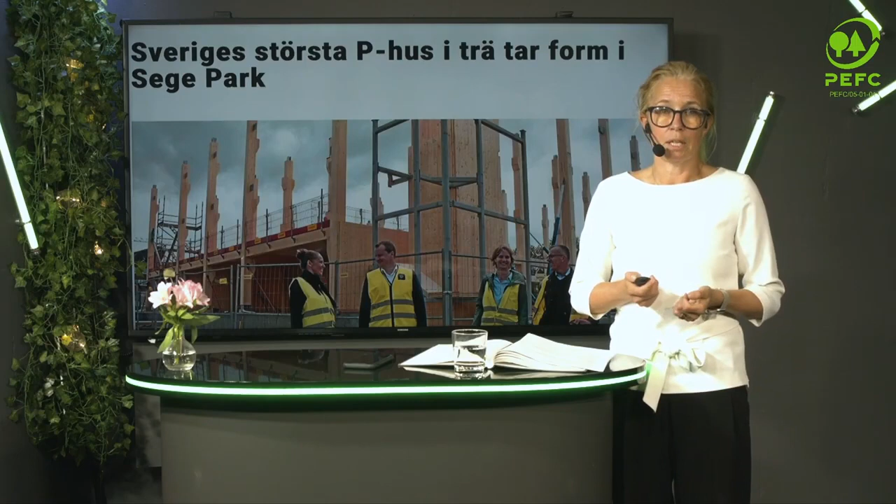This is an office building taken from a time-lapse video camera up in Uppsala, north of Stockholm. And a parking house is being built down in Skåne, in Malmö, 6 stories in CLT.

We have caring homes, and we have also a lot of other types of infrastructure, such as this windmill in Glulam and LVL. And it's being erected, the first ones, outside Gothenburg in the archipelago.

And it's built with the same logic as we build other types of building and even housing. It's built in a modular way. It's really easy to transport thanks to the lightweight and the modularity of the construction. And it's being erected on site and has a really, really low carbon footprint.

And we, of course, also see wood as an interior material for interior use. Also this staircase, which is on NCC's new headquarters in Stockholm, is being prefabricated and transported into a building site and then put into place at a building site.

So why wood in construction? Well, it's not just about exchanging one material for another. It also means that we have a new kind of business logic. It goes from being very much project-orientated to process-orientated. So the process itself, manufacturing technology, quality assurance, continuous improvements, experience feedback, all characteristics from the industrialized wood building industry.

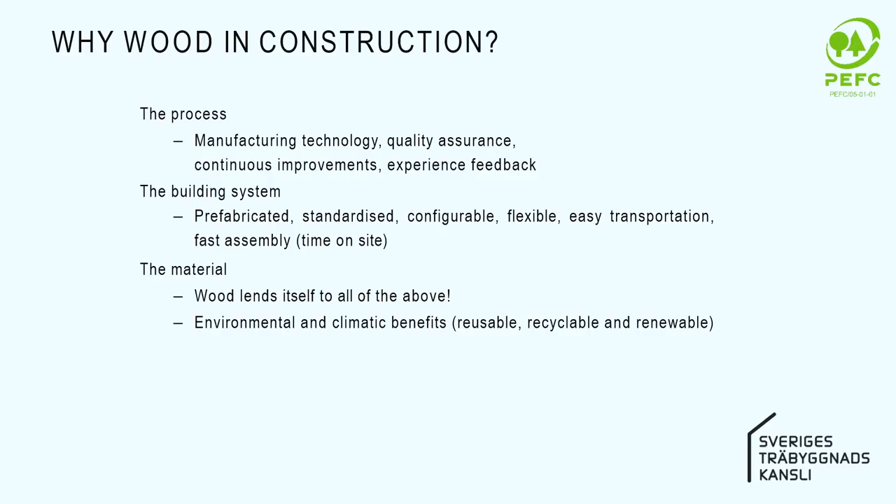And then we have the building systems: prefabricated, standardized, configurable, flexible, easy transportation, and also fast assembly, meaning a short time on site. And the material itself, of course. Wood lends itself to all mentioned above, and also thanks to the environmental and climate benefit from the material itself. It's reusable, it's renewable, it's recyclable.

And the construction industry, when I'm talking about more effectivity and the need for a new building process, has during time proved to have difficulties to develop in the same way that other types of production does. Still has a very poor productivity in general, and actually no improvement at all compared to industrial production. So this is really an area and a hugely important area where wood construction comes into play.

This is perhaps also one of the most important issues to deal with when it comes to sustainability, is to really make use of all the resources that we take on.

Wood construction presents three major building systems. We have the modularity, with modules built to a very high degree with prefabrication off site. Almost 85 to 90% is built at the factory. All the kitchens, the bathrooms, etc., are mounted and put into place already in the factory.

Short time on building site, and just the small adjustments are built on site, which is of course highly useful when we build in the already built environment, and also of course cost effective.

The pandemic perhaps made us wonder about this, but it has proven that the wood building industry is going strong out from this. We have a wide presence at the leading universities, with the big universities having wood construction within their education. There is a lot of municipalities developing knowledge through wood building strategies, and we have some 15 producers of timber building systems.

We have big investments in new capacity, especially in CLT. New suppliers, new producers are entering the market. And we see also that the building industry, the big entrepreneurs, are taking on wood projects at a growing pace.

We have strong wooden architecture, a great variation of projects throughout the country. And there is also a strong political push for wood construction. I'll come back to that.

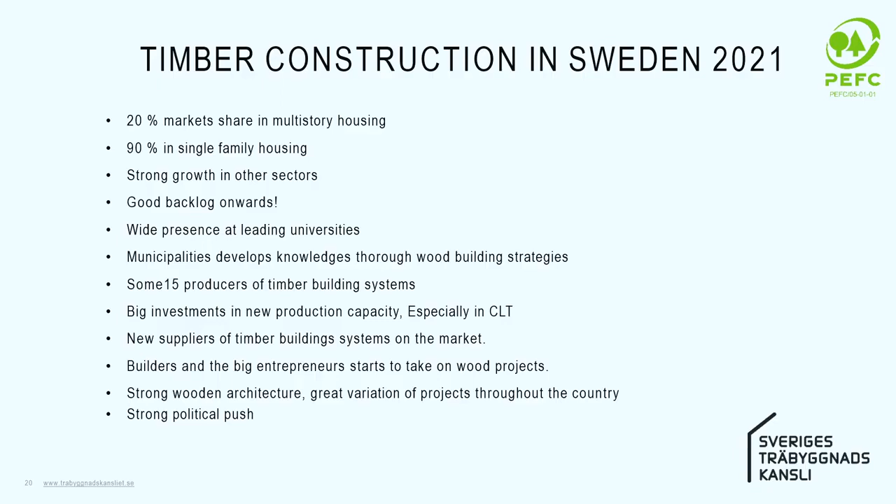The driving forces for wood are these. First and foremost, now it's the climate, the need to change the way we build, the material we use. But there is also a need for housing. We still have a shortage of housing, almost all around Europe, in the world, I would say. But in Sweden especially, this is a driving force.

But also a need for a new building process, as I just talked about. And of course, work opportunities. Going towards a development of the off-site construction industry means that we could move construction work from the big cities towards smaller cities where the wood building industry is located.

And they are located where the raw material is. So it's along the coast in Sweden, up in the north and down in Småland and on the west coast, predominantly. But you can also turn this into the driving forces. It's now or never. This is Agenda 2030, and this is what Sweden as a nation has committed to, but also the regions, the municipalities, and the whole building chain are working towards the Agenda 2030 goals.

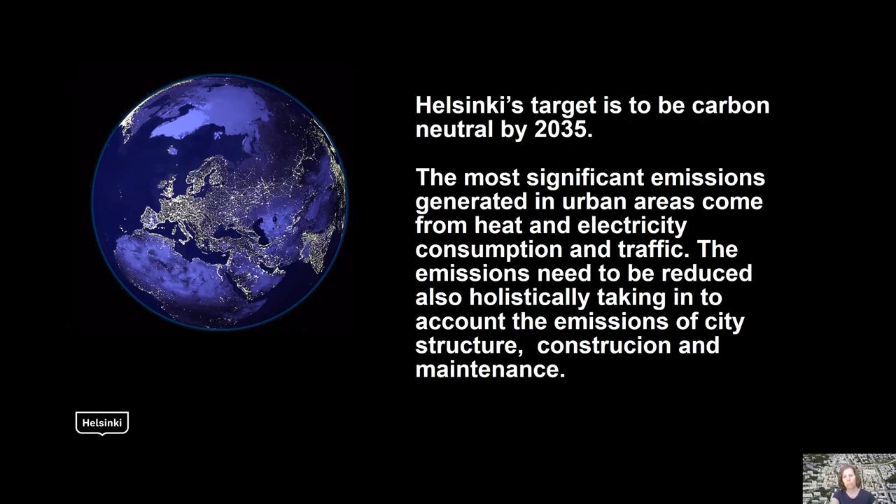Helsinki aims to be carbon neutral by 2035 and has an action plan with 147 actions towards this goal. We need to implement every single one of these goals now if we want to achieve it. The action plan affects basically everything we do. We need to look at Helsinki and the world through carbon neutral lenses.

19 of the actions affect detailed planning one way or another. Wood is one of the big issues in the action plan also.

So why would we have to build with wood? In order to reach carbon neutrality, at least at the moment, we need to focus on wood in the building industry. In the Carbon Neutral Helsinki Action Plan, I think one of the most important actions in detailed planning is to build more wooden buildings. In building construction, we need to choose the lowest carbon materials possible, and at the moment, wood is the answer to this challenge.

People have often asked me, is there enough wood to build so much? Well, if you build a 5-story apartment block from wood in Finland, it takes 10 minutes to grow back in the Finnish forests. Or the same thing, if you build 138 wooden apartment blocks every day. So at least in Finland, it's not an issue. There is enough wood.

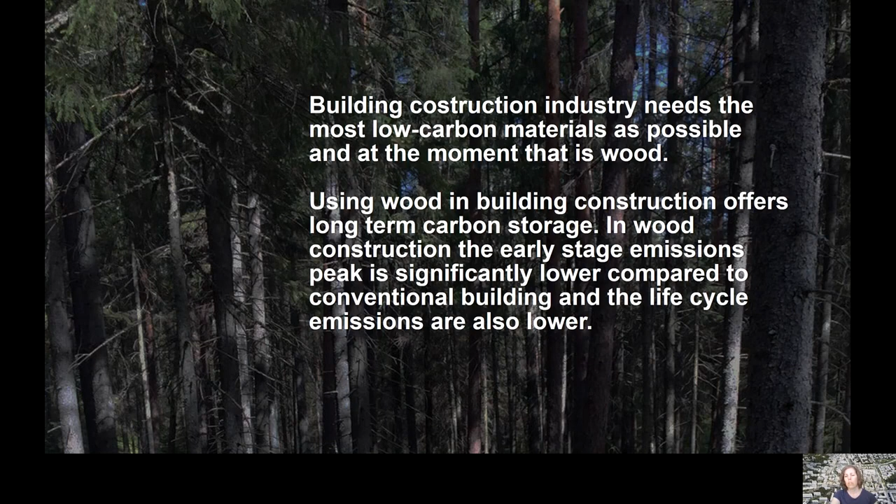Wood offers long-term carbon storage, and the emissions during building construction are significantly lower than in conventional building.

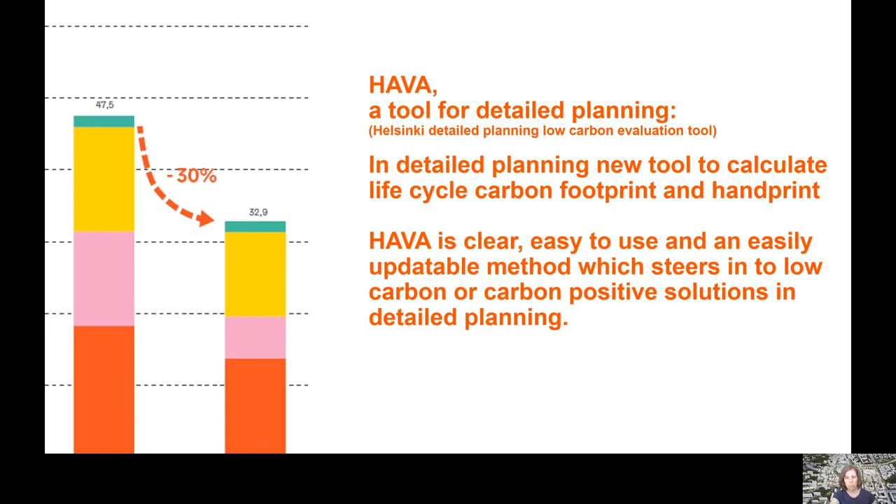We've generated a new tool for detailed planning called HAVA, to calculate life cycle carbon footprint and handprint. We made it so simple that it could be used in all our detailed plans so that we could get as carbon neutral as possible. Construction and maintenance may be almost 50% of the emissions in the life cycle of an area, so using wood in construction is a very significant part of aiming for the carbon neutrality target.

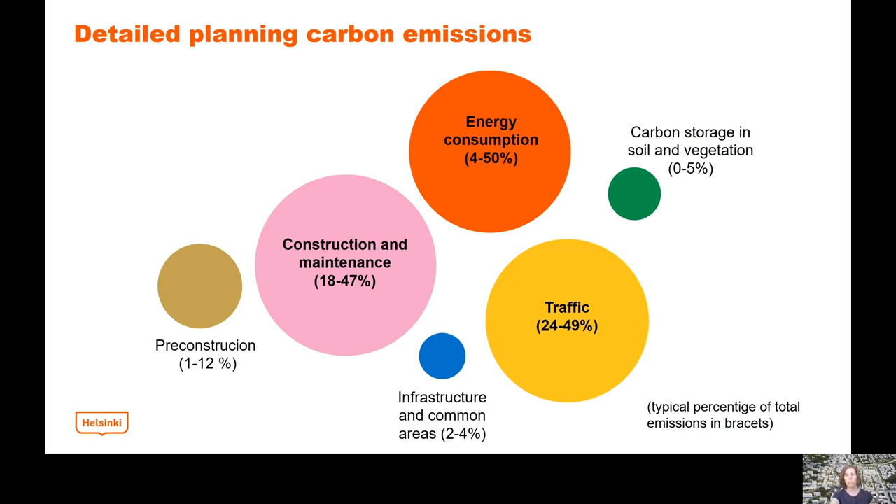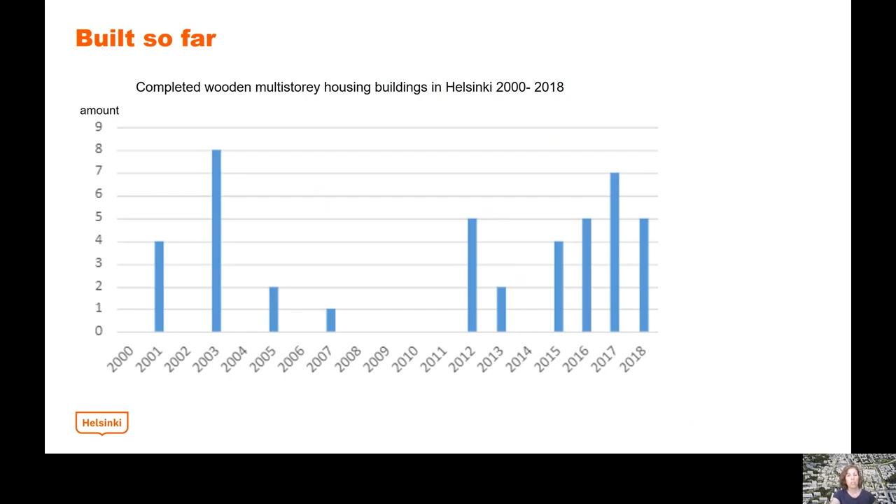The first detailed plan which required wooden structure in multi-story housing came into effect about 20 years ago. There was some experimental building, and not all were actually built with wooden structure. But the one with wooden structure gained a prize and some praise.

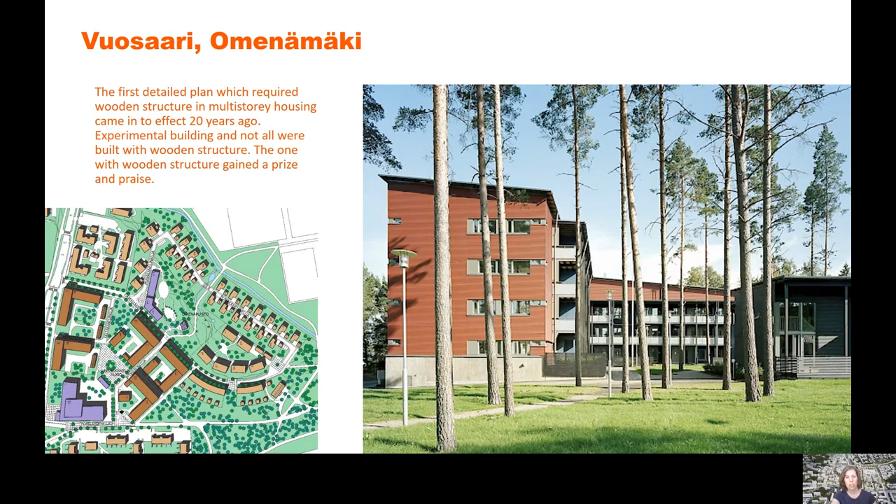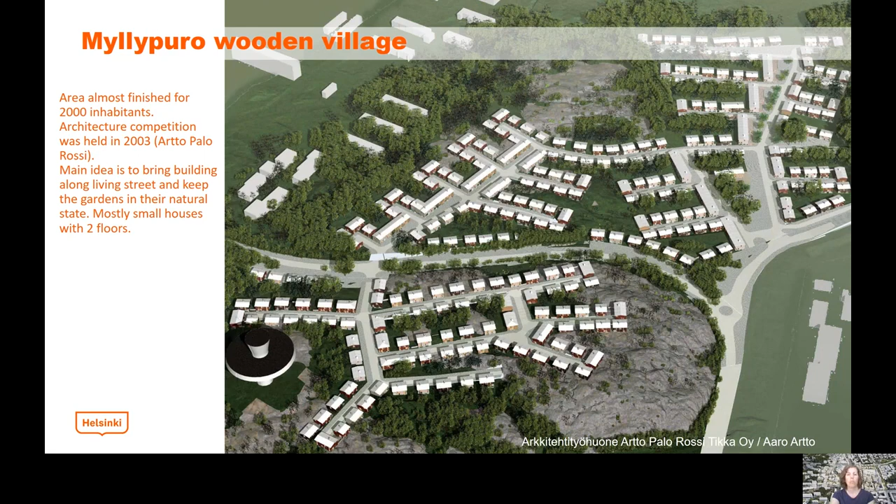Myllypuro Wooden Village is an area almost finished at the moment, for about 2,000 inhabitants. There was an architecture competition held in 2003, and the main idea was to bring buildings along living streets and keep the gardens in their natural state. Mostly it consisted of small houses with 2 floors, but there were still some blocks of flats also. Here are some images of the area.

A wooden village for 2,000 people started to be built around 2010 in Honkasuo. Betoniteollisuus ry, the Confederation of Finnish Concrete Industries, made an appeal against the detailed plan with wood requirements, but the appeal did not succeed. The judicial system assessed that requiring wood in building is justifiable for the positive impact on climate. This helped many Finnish cities to start requiring wood in building.

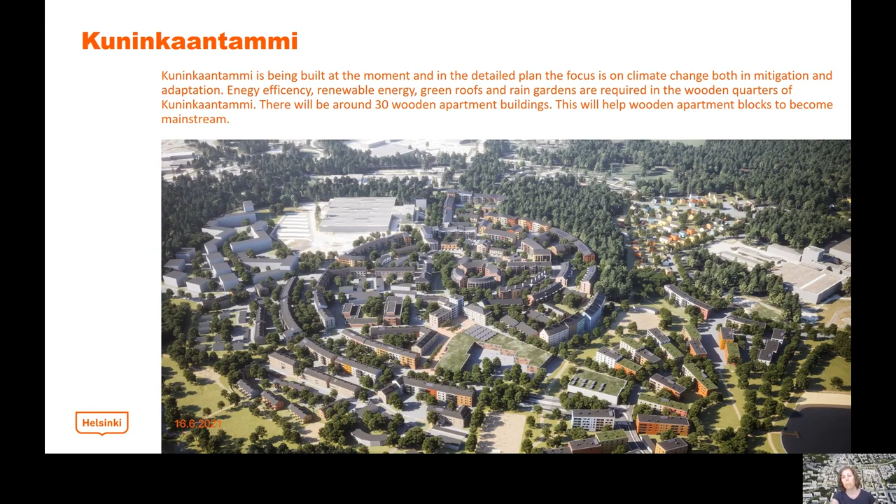Kuninkaantammi is being built at the moment, and in the detailed plan the focus is on climate change, both mitigation and adaptation. Energy efficiency, renewable energy, green roofs and rain gardens are required in the wooden quarters of Kuninkaantammi. There will be around 30 wooden apartment buildings. This will help wooden apartment blocks become mainstream in Finland.

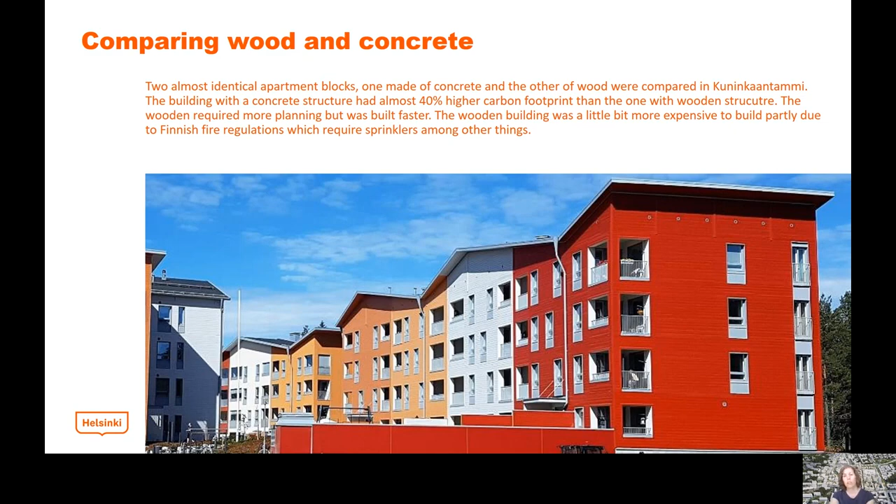In Kuninkaantammi, 2 almost identical apartment blocks, a concrete one and a wooden one, were compared. The building with a concrete structure had almost 40% higher carbon footprint than the one with a wooden structure. The wooden one required more planning, but was built quicker.

Several wooden schools and daycare centers are being built in Helsinki, among other public buildings. Most of them are required to be wooden from now on. Lapinmäki was the first daycare center with a massive wooden structure.

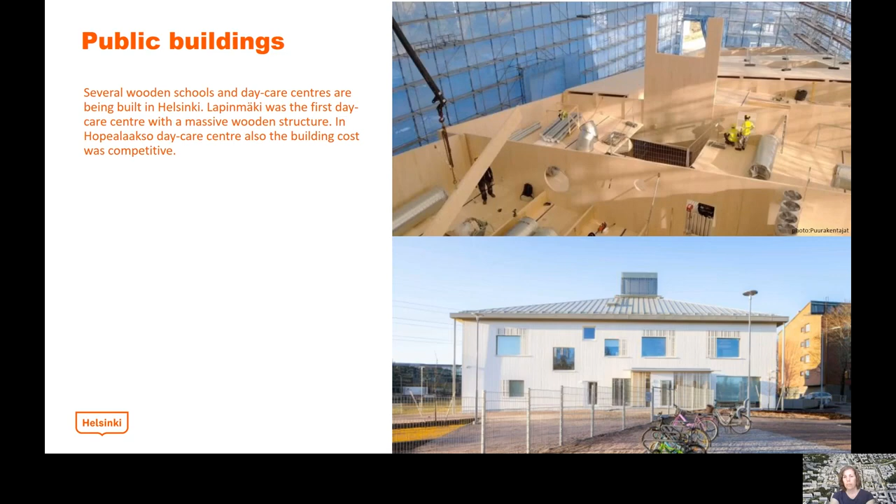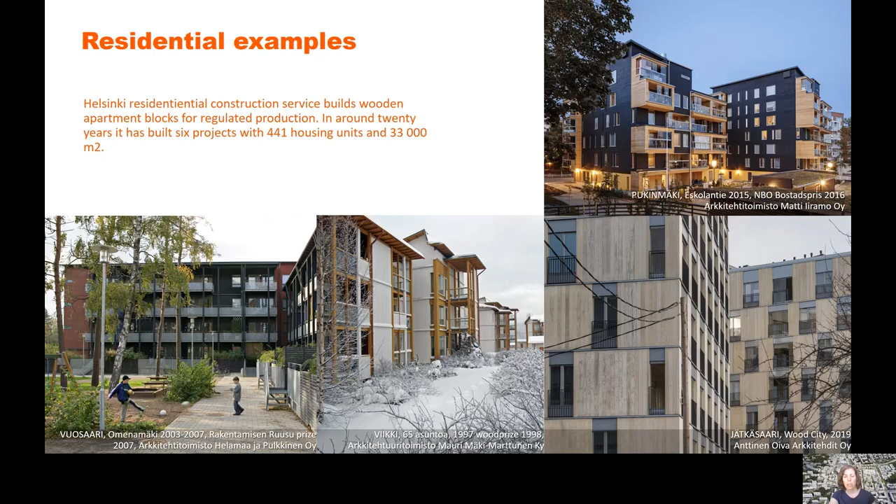And some residential examples: Helsinki Residential Construction Service builds wooden apartment blocks for regulated production. In around 20 years, it has built 6 projects, but this is going to increase in the future. Here are some examples from Vuosaari, Pukinmäki and Jätkäsaari, so all over Helsinki.

So how does the future look like in Helsinki?

The future in Helsinki is wooden. We're planning to have a lot more wooden building in the future, both in large residential projects and in infill building. Here's a map about the future places where wooden buildings will be located.

Concrete has been for so long the main construction material that people don't come to think about building with wood. This applies especially in infill building, but we're about to change this. Industrial prefabrication is popping up more and more, and hopefully wood will be seen as normal construction business in the future.

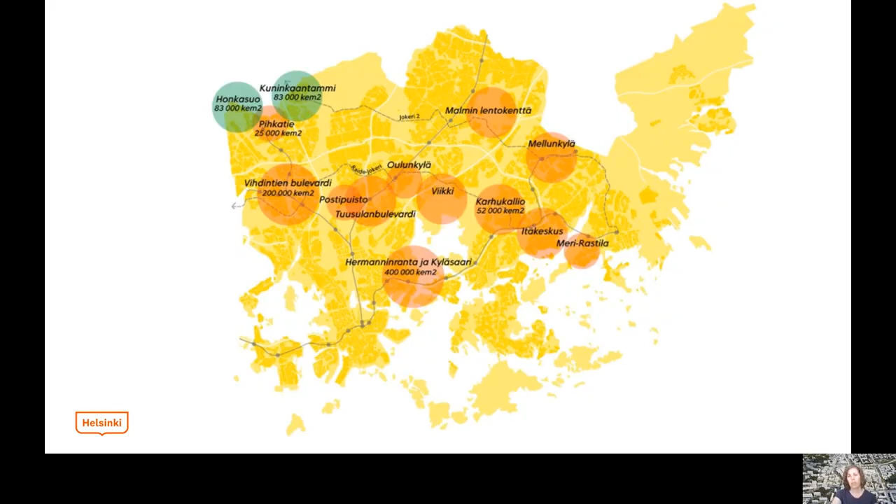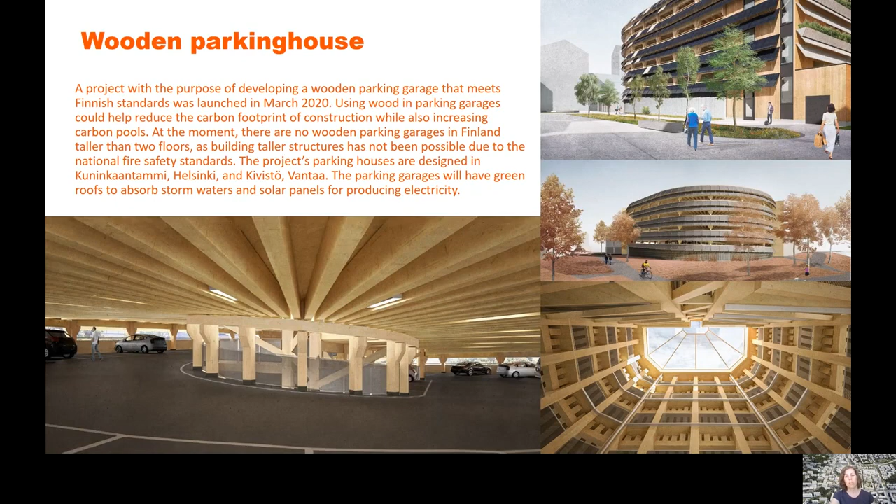Here's one project which has been really interesting. A project with the purpose of developing a wooden parking garage that meets Finnish standards was launched in March 2020. Using wood in parking garages could help reduce the carbon footprint in construction. The project's parking houses are designed in Kuninkaantammi, Helsinki and Kivistö, Vantaa. Vantaa is right next to Helsinki. The parking garages will have green roofs to absorb stormwater and solar panels for producing electricity. I'm really hoping to see these built in a few years.

How about urban renewal? Is wood okay in there? Many people say when asking about building in wood that yes, we want to support building with wood, but just this plot or this location or this project is not suitable for it. This is why we need to talk about building in wood more, so that it comes up in early stages so that it is possible to build with wood.

In infill building, wood is very suitable because it's light, especially for adding floors, and the buildings may be prefabricated, so they are quick to install on their plot, so the public wouldn't mind the building so much. Wood is also a likable material, which the neighbors will accept more easily.

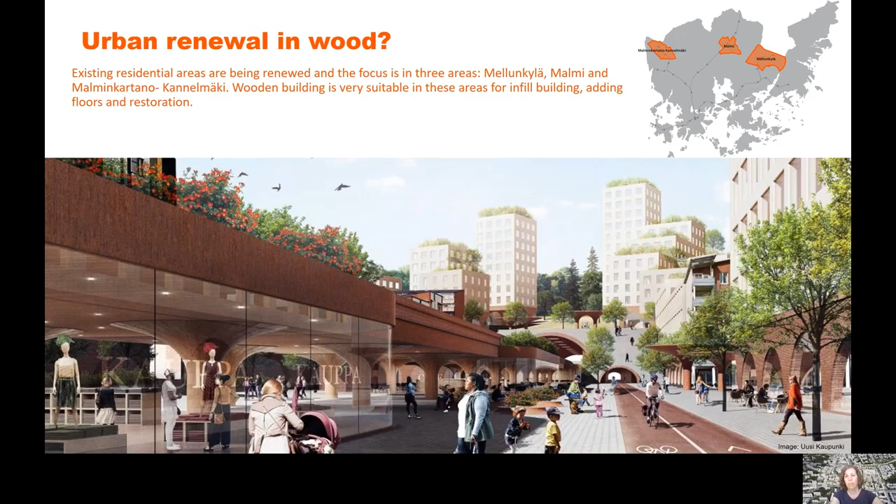Here's an example about wooden redevelopment and adding floors. There has been an interesting project where the outer shell of a 70s concrete block has been redeveloped in wood, and there's been 2 floors added on top of it, also in wood. There's so far been a competition about this, and we don't yet know when this will be realized.

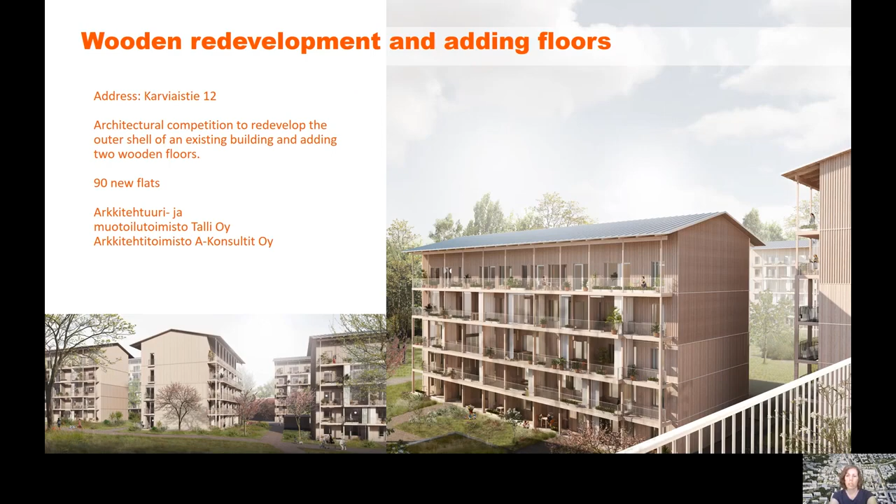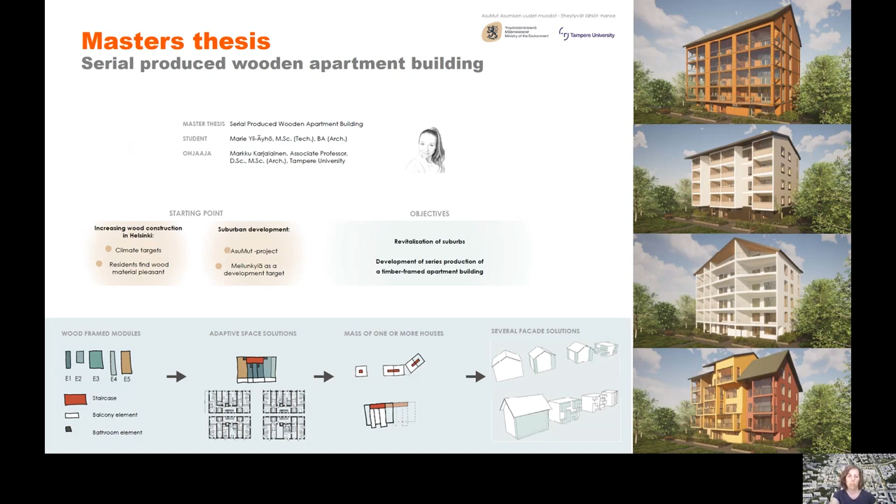We also have a master's thesis project going on in Tampere University for infill building. Marie Yli-Äyhö is designing a serial produced wooden apartment building. The building's construction is massive wood and has possibilities for variation. I'm very eager to see how this develops, and hopefully we'll be able to build these one day. With the same basic structural solution, buildings with varying architecture can be achieved, as you can see on the right-hand side.

Then I have some other examples from areas. This Kontula has a metro station and a shopping center with a surrounding residential area from the 1960s and 70s in eastern Helsinki. It's part of the Mellunkylä urban renewal project. There was an architectural competition last year for the urban renewal of this center. The winner had a flexible concept that allows a lot of diversity and phasing, etc. Wood was being used in residential building in many places, and it had vibes from the 70s in an interesting way.

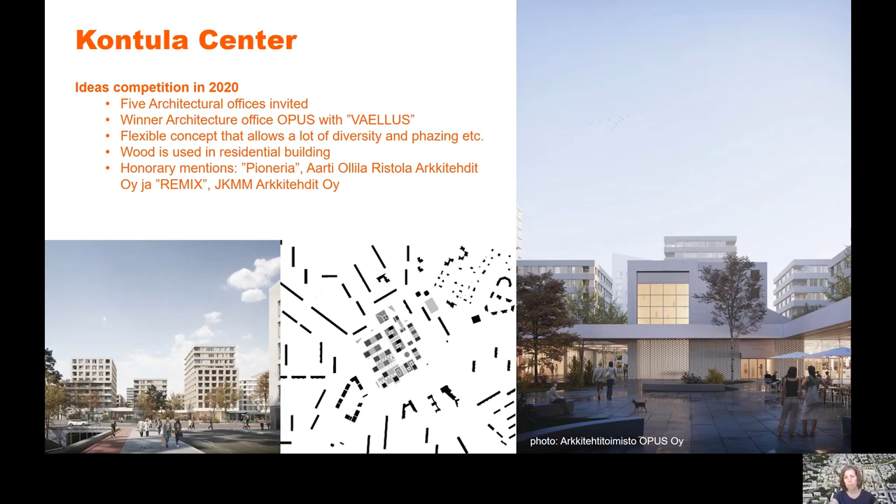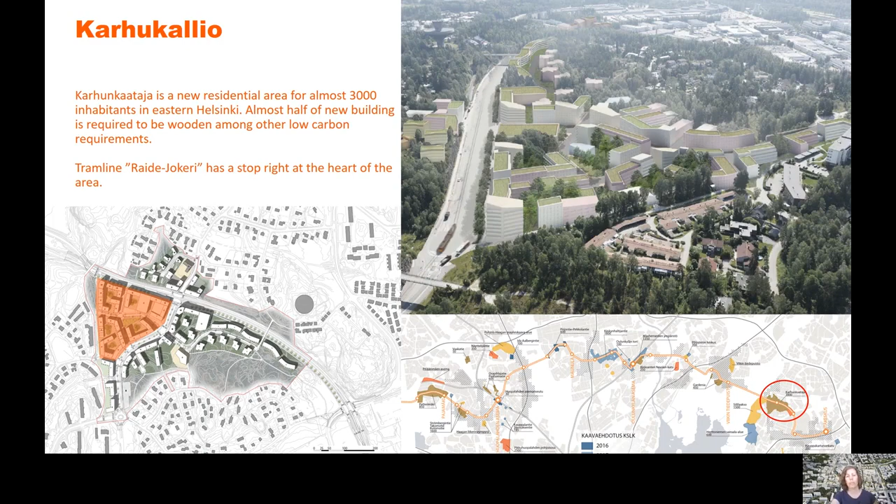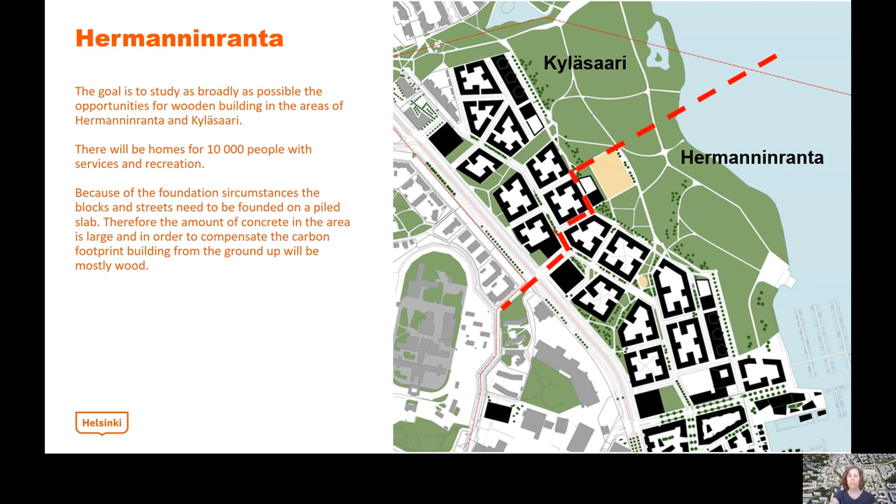Hermanninranta is also a big new area right next to the center. There will be homes for 10,000 people with services and recreation. Because of the foundation circumstances, the blocks and streets need to be founded on a piled slab. Therefore, the amount of concrete in the area is already large, and in order to compensate for the carbon footprint, building from the ground up will be mostly wood.

While Hermanninranta is going to be a substantial area with wooden building, there are several questions that need to be considered during the planning process, like the impact of wooden building on cityscape, or wooden building in welfare and living conditions, the impact of wooden building in climate change mitigation, and the readiness of the wood industry. How will planning regulate building in wood? But since choosing wood as the primary construction material at an early stage, all these questions will be able to be answered as we go ahead with the planning.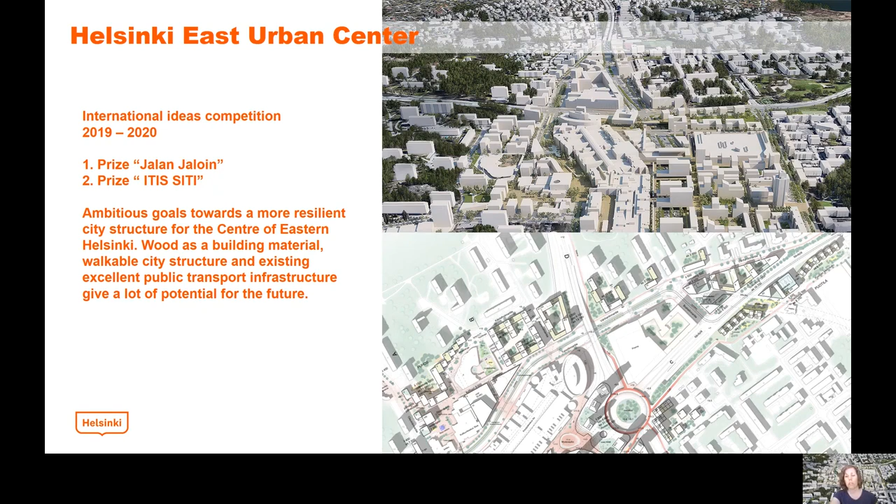Carbon Neutral Helsinki 2035 action plan will steer us in the future. Puotilanranta is right next to East Urban Centre, or Itäkeskus, and it also has goals towards being carbon neutral in the future. City planning takes such a long time that the plans and designs we make in city planning actually should already be carbon neutral.

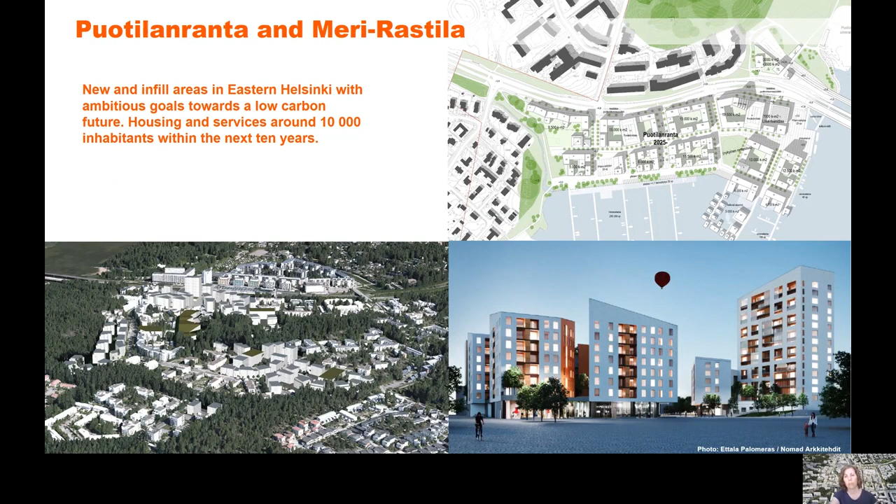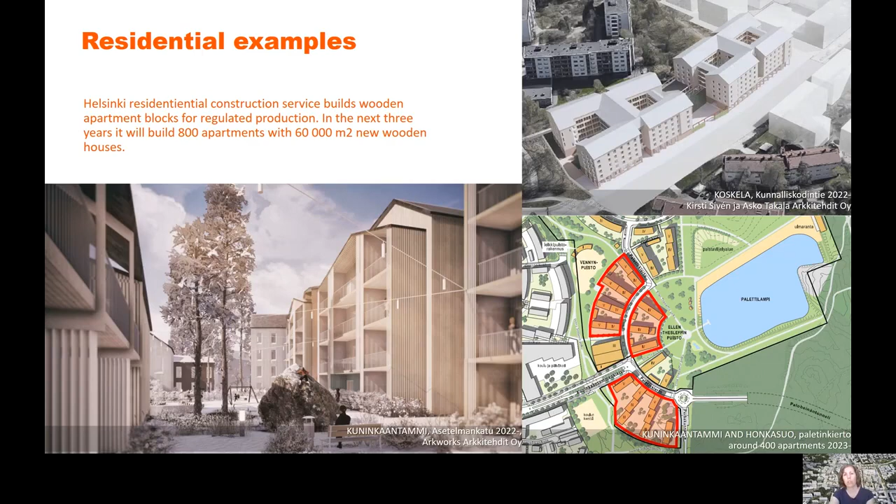Here's a couple residential examples also. The residential construction service builds wooden apartment blocks for regulated production, and in the next 3 years it will build 800 apartments with 60,000 new square meters of new wooden houses. So the speed in wooden production will increase there too. There has been some concerns about builders though - is there enough builders, enough knowledge in design and construction, etc., if we want to build so much in wood?

So will Helsinki be carbon neutral in 2035? At least I'm trying my best to make this goal achievable. We all need to think it will happen, and then it will. If you want to follow the future of Helsinki, here's some links. And if you want to take a closer look at the action plan, here's also a link for that. Feel free to contact me with questions, etc.

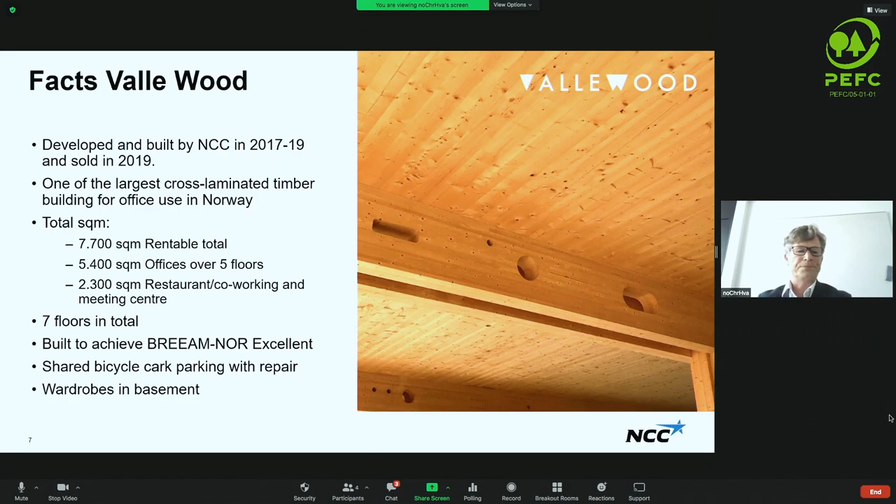We can't dig into the concept of the building, but it's also a new way of thinking about how to integrate the tenants' needs with the commercial areas. That's quite new in Norway, and it's a new business model for the tenants in this building.

And as you see, it was very well received in the market. It's a beautiful building with a lot of special features to it. So you really should go and visit Valle Wood if you have the opportunity.

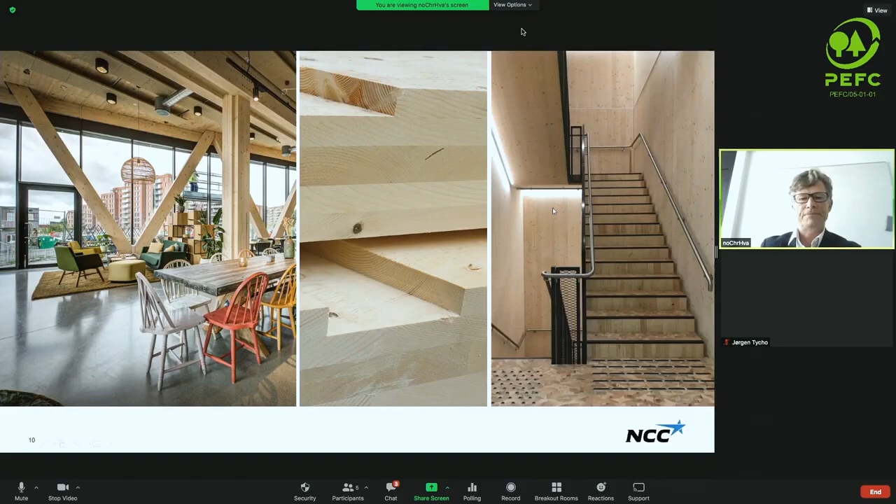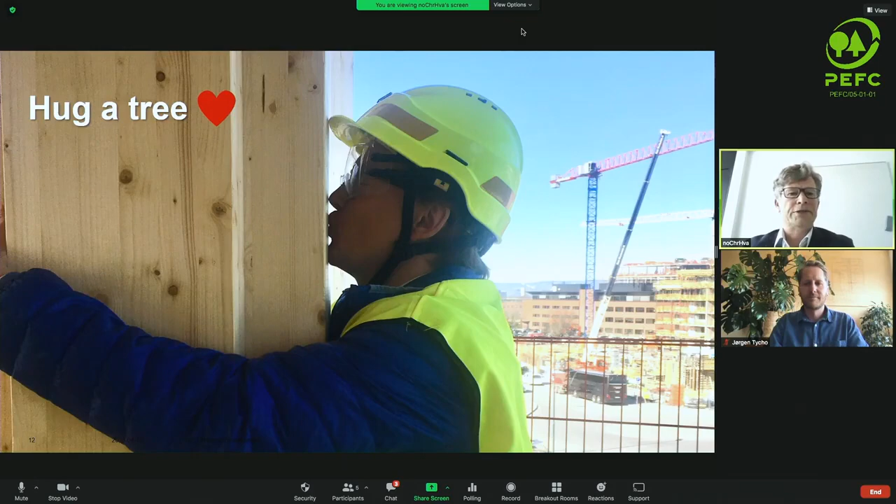And of course, one of the main things is that everybody loves wood, and also the builders. They loved to build this building, and we had very low absence of sick leave. That's unheard of in normal NCC buildings.

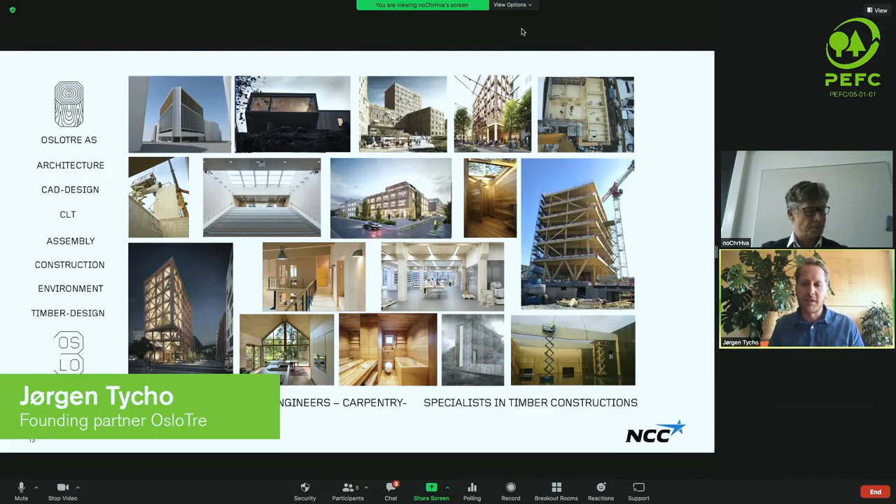Hello, good day. My name is Jørgen Tycho. I am creative director of OsloTre. We are an architect and engineer company specialized in timber constructions for the last 12 years. And on the Valle Wood project, we assisted NCC to develop this timber construction.

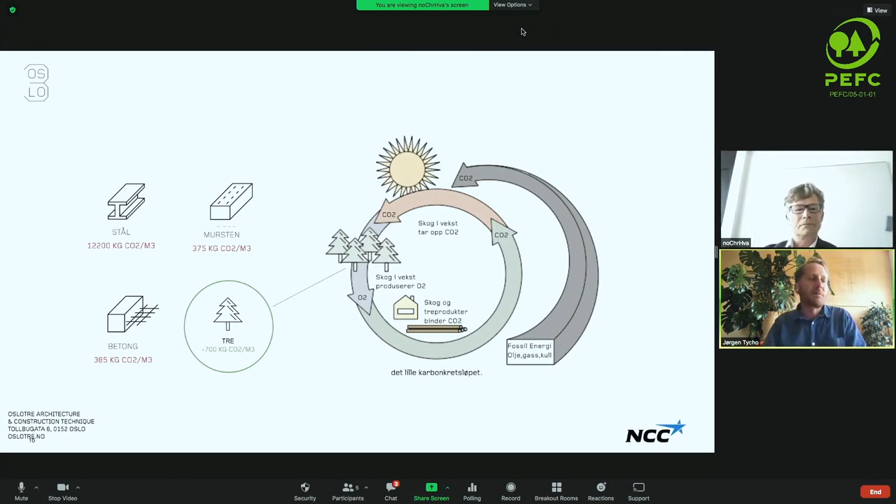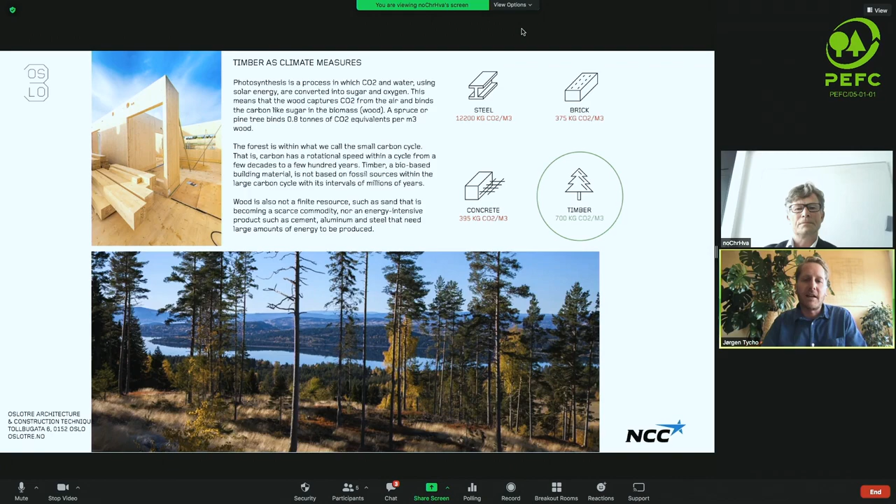By using timber as our main building material, we can actually have a negative carbon footprint, as opposed to other large-use building materials that have a large output of carbon during production. In this way, we can start to look at the forest as a carbon sequester, and our buildings and cities as carbon storage units. In this way, in the short run, we can deal with some of the carbon issues we have in the building industry today.

So Valle Wood is a 7-story pure timber building. You can see the facade here. It's made of heartwood of pine that is untreated, but it's fire impregnated.

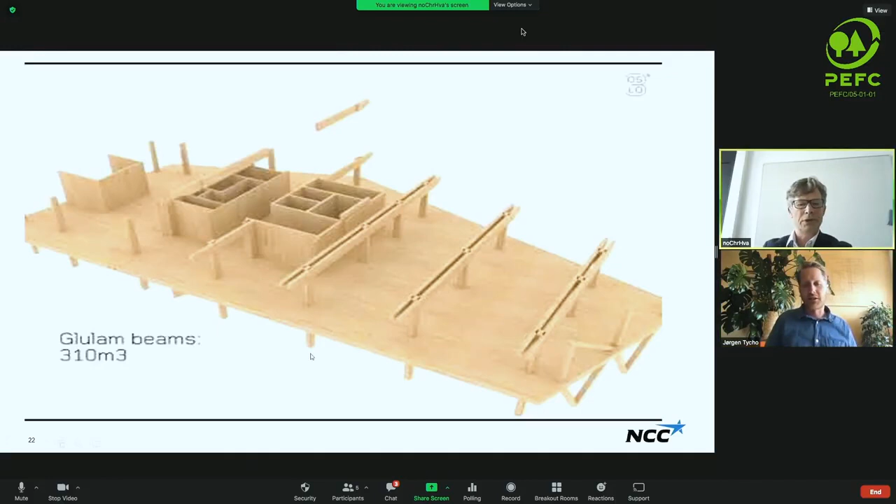Yeah, I think this is a video, Christian. It won't play. You want to start? Okay, we'll just go past it. It's on YouTube, it's on YouTube.

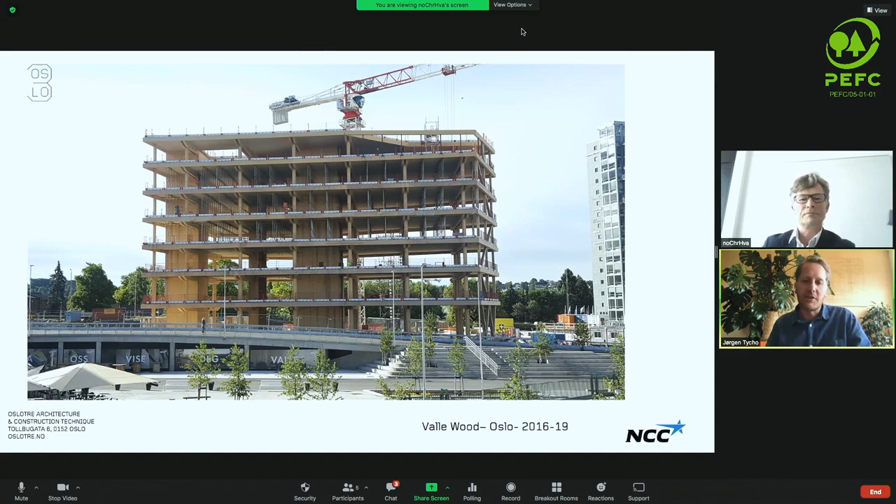So here we see the building before the cladding is on. What we see are the vertical towers for the elevators and stairs made of CLT. Then we have the column beam construction of glulam, and then we have the CLT slabs, or the TCC slabs. So the actual span here is 7.5 meters, which is a good span for an office building.

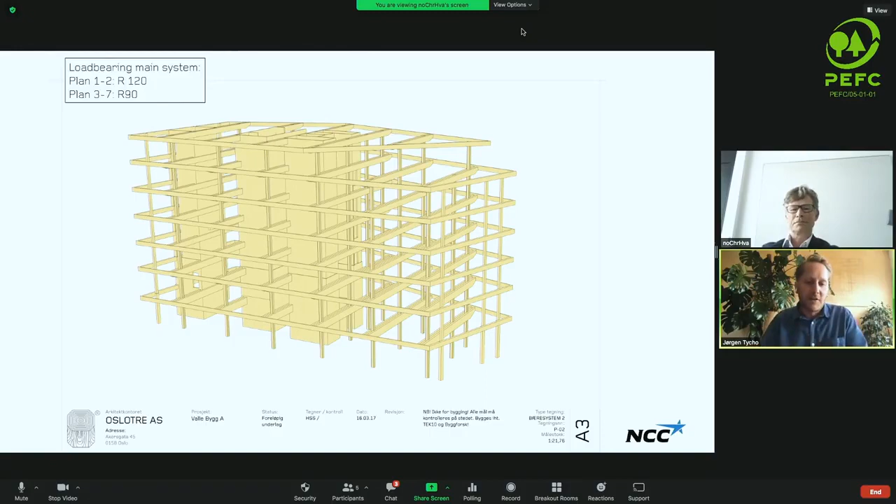Timber burns, but it burns very predictably. So all we see here is actual visual wood, and we wanted to have as much visual timber as possible in this building. But that gives some quite drastic fire requirements. We have 120 minutes on the 2 first floors and 90 minutes from the 3rd floor and up. We achieved this by making the timber a bit fatter, a bit bigger, to handle the fire requirements.

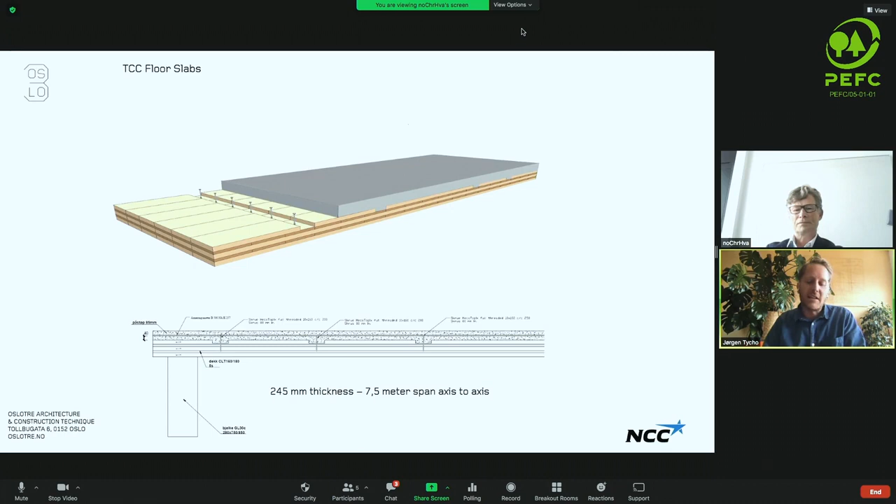Also, water is an issue on a building like this. On top of the CLT, here we see the CLT slab. It's actually a TCC slab, a timber concrete composite working together, where the timber takes the tension and the concrete takes the pressure, making this slab extremely thin, only 24.5 centimeters thick. Actually thinner than what a concrete slab would be with the same span. So a very interesting slab, and also the first time, to my knowledge, used in a large scale building, in 2016.

So when we work with timber, the reason we work with what we call engineered timber, or modern timber, is because of BIM, because of the digitalization, and how we can achieve millimeter precision before we send it to the factory for production. This is also very important to be able to build these super precise timber constructions.

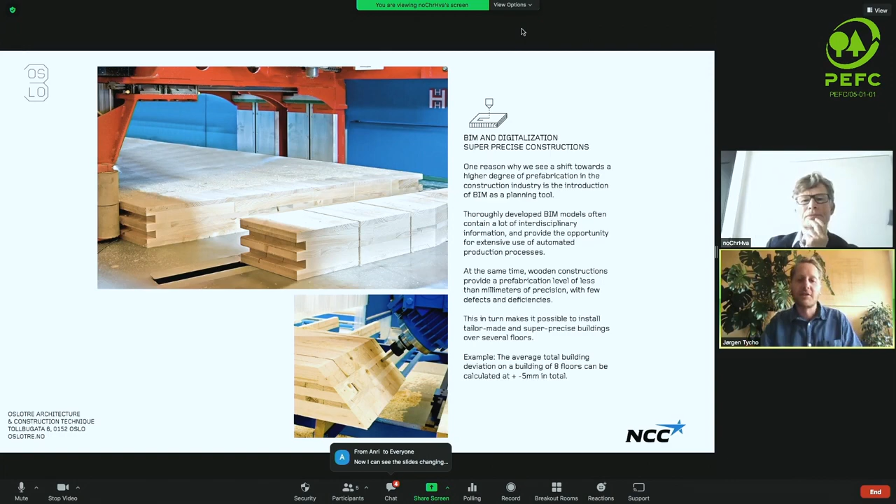So what was done? It was built up like a building set, almost like an IKEA model, where all the different advisors were part of this. You can just run through these pictures, Christian. You can see all the installations. Everything is planned before building start, and this is also an important premise for when you build with timber.

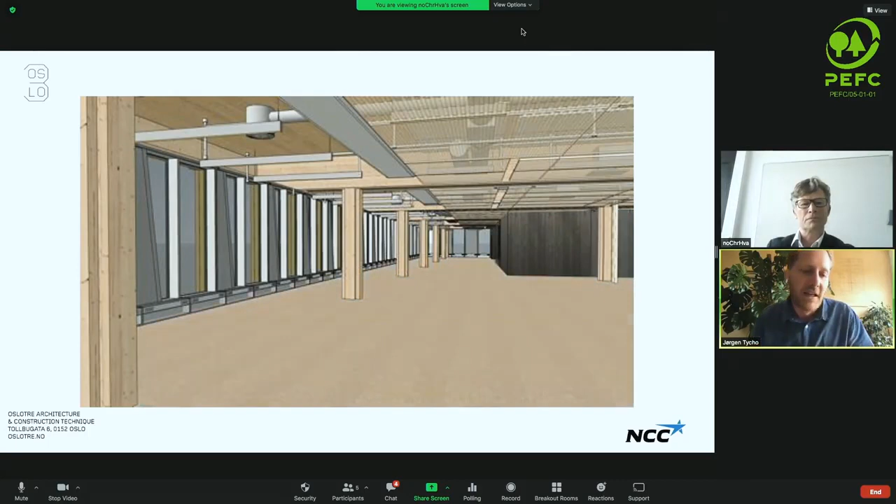You need to design it completely finished before you start up the production of the building. And this way we can also get an economical structure, because we reduce the material loss, and it's much easier to plan for the construction. Next.

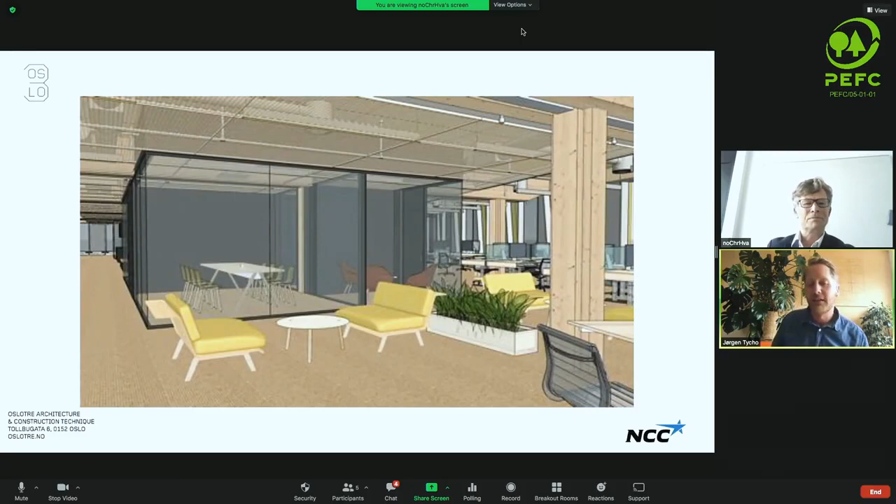So what is done is actually even every element, every piece that goes into the building is added a lot of knowledge and information. And in this way, when we come to the building site, you don't really have to think that much. All you have to do is assemble these pieces together. Next.

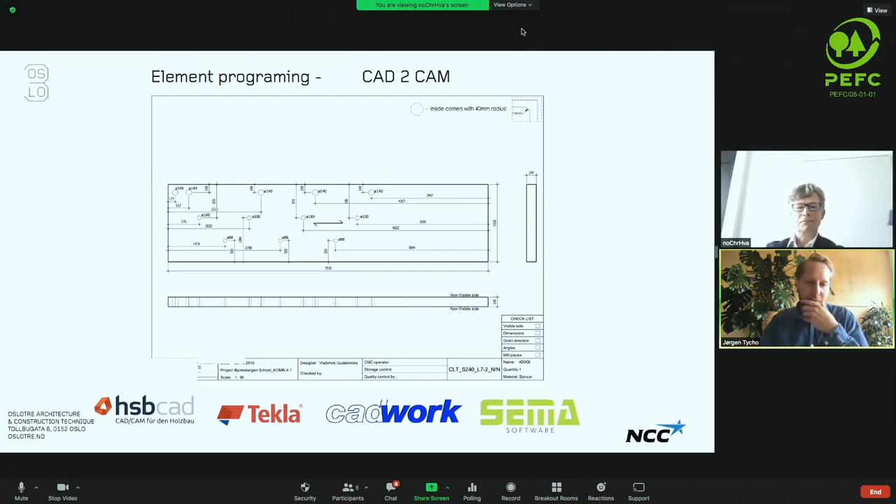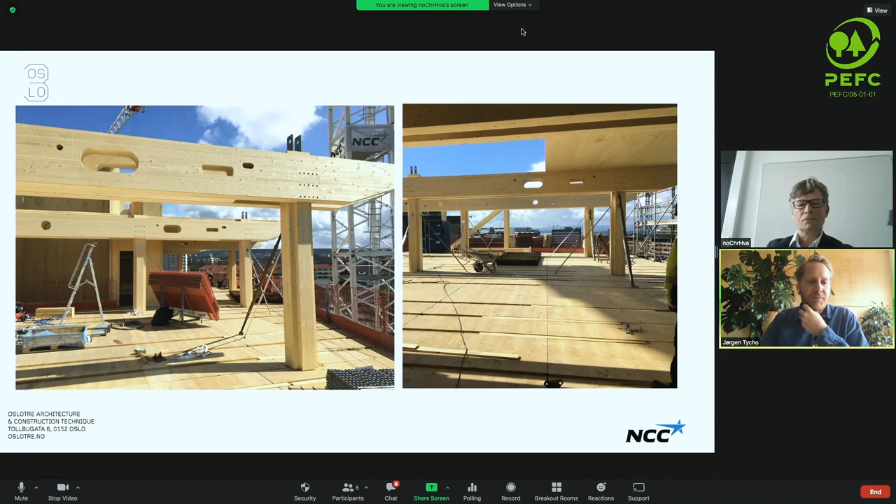Here we can also see the slabs, the TCC slabs, before the concrete is casted. This is possible to do in two ways: either you cast the concrete on site, or you make these elements off site and then lift them in. But in this project, we chose to cast the concrete on site.

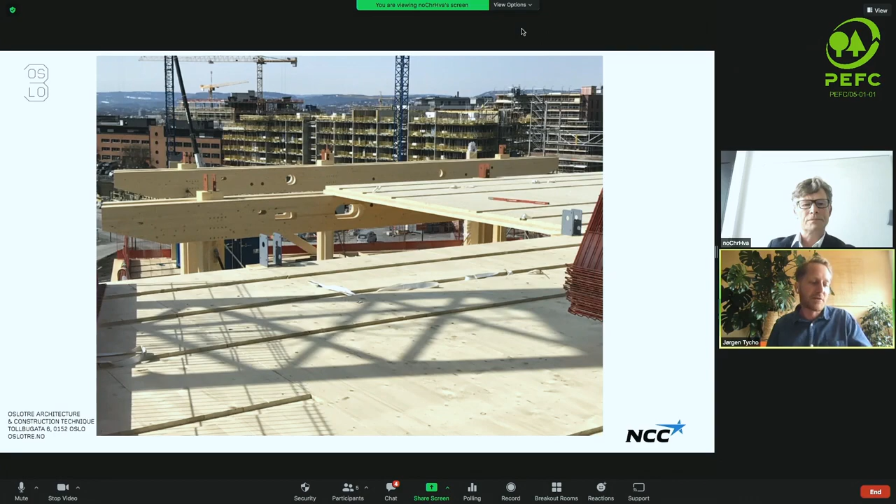Next. So here we see one of these interconnections that is only possible to do if you work with these 3D models, and the precision is under millimeter precision, even up here on the 7th floor of the building. Next.

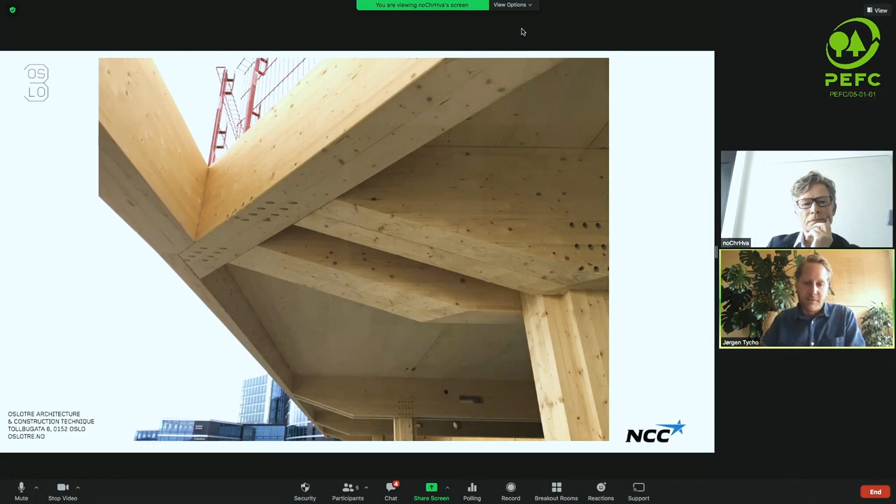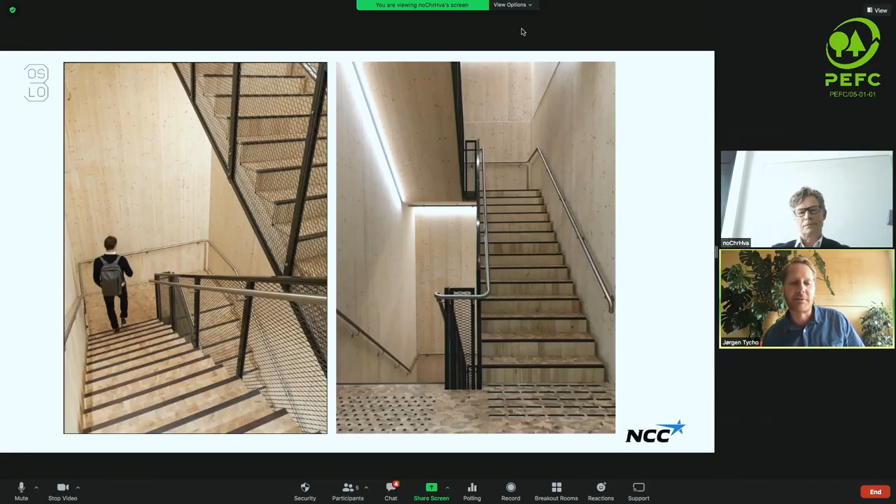Some more details. Also, the staircase is made of CLT, made of timber. This is actually the only part of the building that is fire treated, so it has fire paint on it, but it's not visible unless you're very interested in fire paint—then you would see it. Next.

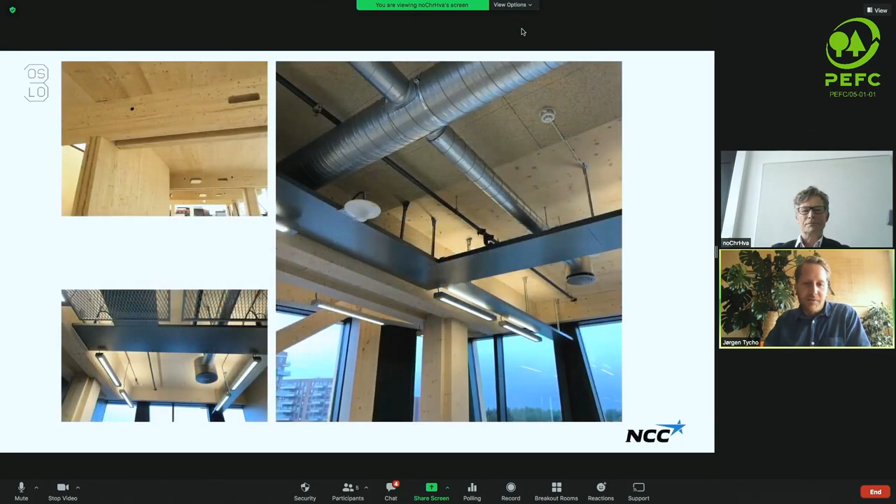Here we can see from the office environment. Next. And the installations and the restaurant on the first floor. Next.

I will end our presentation with some experiences from the building. As Jørgen mentioned, planning is vital. It's very important that we get all the information into the 3D model, and this is, at least in Norway, not the way contractors normally work.

We have to have a high degree of collaboration from the start, so we also had to make new contracts with the most important subcontractors, to get all the information into the model before we order the timber construction.

We had some interface issues between the concrete and the wood, because we have two parking stories underneath the wooden building, and everybody had to be very precise at that interface between concrete and wood.

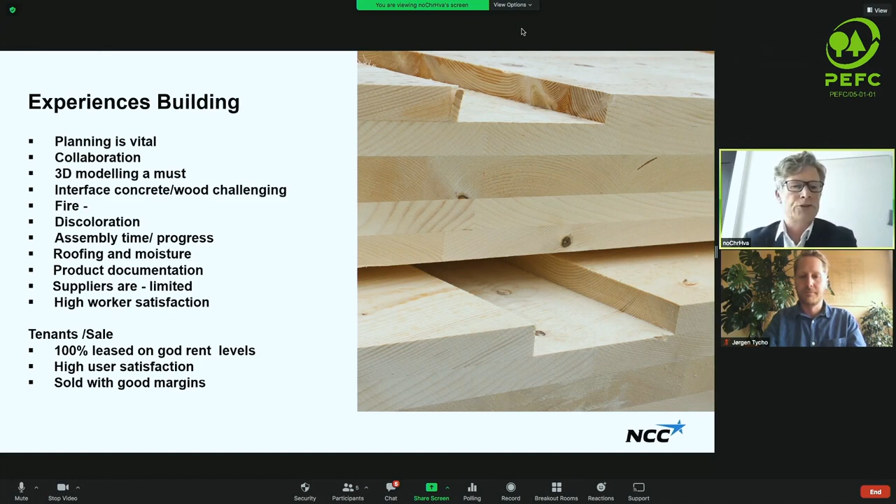Then I can close up with some nice pictures. I also have to mention that Løfte Architects in Oslo have been the architect of the building. Okay, thank you.

Thank you very much, very interesting and a very impressive building. I just have a question for you, Christian—you mentioned some of the challenges. Was there something you were really surprised about, or what was the biggest challenge for you as a construction company in this project?

I think there weren't really any big challenges. When we started, we had some ideas that we would get some challenges with the timber—that the timber would expand and retract, and that would be an issue.

That was not an issue at all. But we had this interface between the concrete and the timber that was not precise enough, and we had discoloration. The timber was out in the weather in winter, and we got a lot of stains on the wood. Since we wanted the wood to be visible, we had to sand down a lot more than we originally thought.

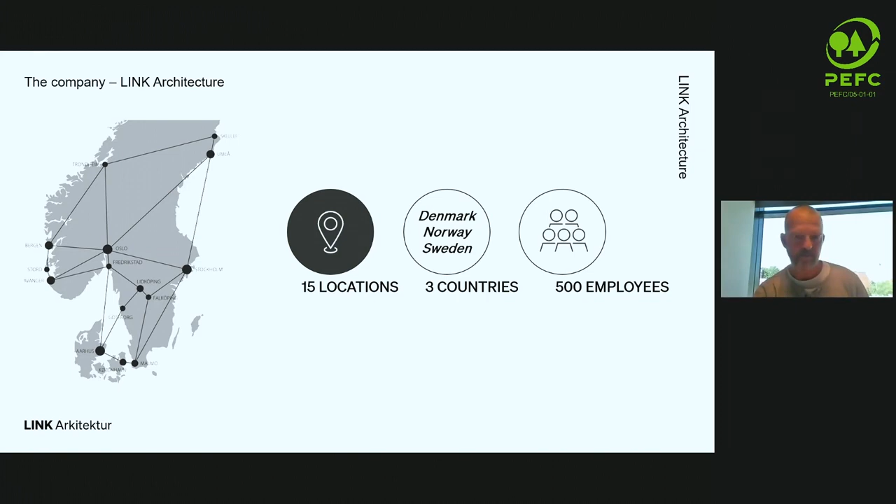We're working in most sectors of the building industry. We do a large proportion of health buildings, hospitals. At present we are involved with some of the so-called super hospitals in Denmark. Presently we're finalizing University Hospital in Aalborg, and we're also presently involved in the new University Hospital in Oslo.

We also design schools and institutions, like the one you were so fortunate to mention in your introduction to the seminar, the Hoppet in Gothenburg.

We also have a small design department where we do industrial designs like hospital equipment, ranging from that to wooden stoves, and we also do design for a famous Danish company called Vola, who are famous for their water taps designed by Arne Jacobsen.

We also do housing, different cultural buildings like this sports arena from Randers. We do urban planning and also commercial buildings like offices and retail buildings.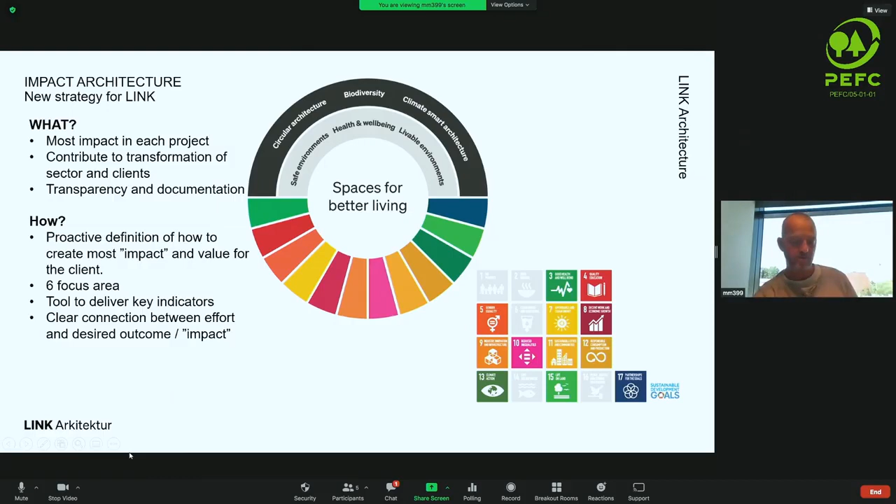We've selected 6 focus areas that we think are the most important issues to deal with, and we've used these to relate our strategy also to the UN Sustainable Development Goals, and to make a priority of the sustainable goals where we will be able to influence and give a positive impact. Our strategy will also aim at developing tools to deliver key indicators to give a clear connection between our effort and the desired outcome, again with the focus on documented results.

In Denmark, as with the other Nordic countries, we have adopted the Paris Agreement back in 2015, and this has resulted in the Danish government adopting a climate law where we have a target of a 70% reduction by 2030. It's important to look at the building industry, which is responsible for approximately 30% of the CO2 emissions in Denmark.

The focus within the building industry is actually shifting from energy in the operation of buildings to the materials and the energy and resources used in materials. In Denmark, particularly compared to Norway, Sweden and Finland, we use a lot of concrete, and it's very industrialized the way we use concrete in Denmark. And that is, as we all know, a very high energy consumption material.

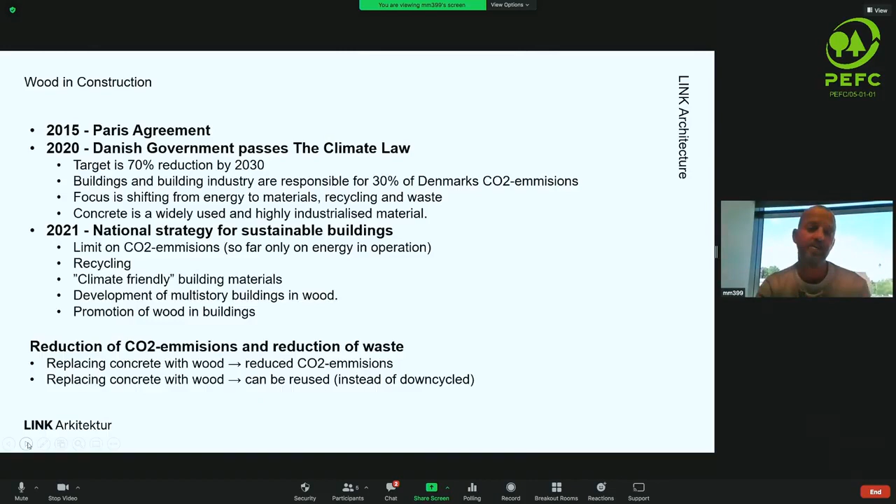This is just to show you the timeline of the government strategy, which actually shows that for buildings over 1,000 square meters, they're trying to put thresholds to how much CO2 a building is allowed to emit in the construction phase, not only the operation phase. So this will hopefully increase the focus on limiting CO2 emissions in construction, and therefore would be a natural choice of material.

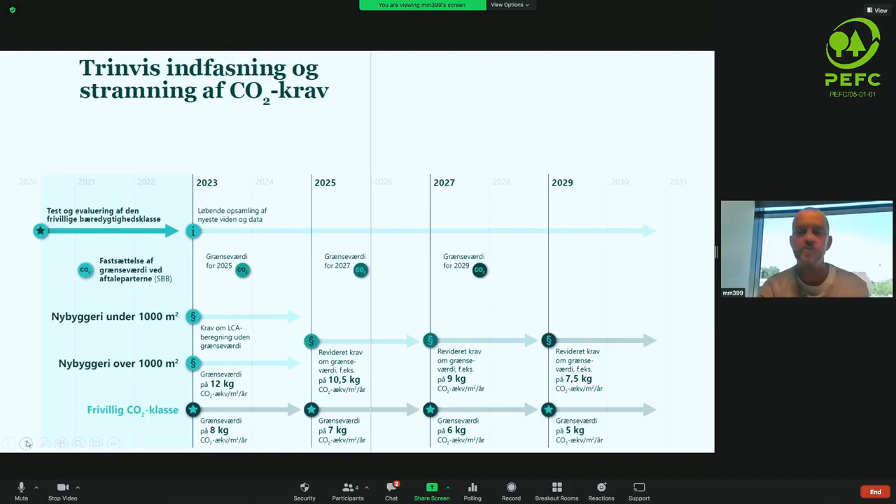Wood is of course certified by PEFC. It can also be certified by FSC, and we have other certification schemes that are operating in Denmark and the other Nordic countries. For us in the building business, it's a great help that we have these certifications and standards to actually make it a lot easier for us to use sustainable materials. It's getting more and more widely used in the industry, and therefore it also becomes a lot cheaper to make sure that you are using sustainable materials.

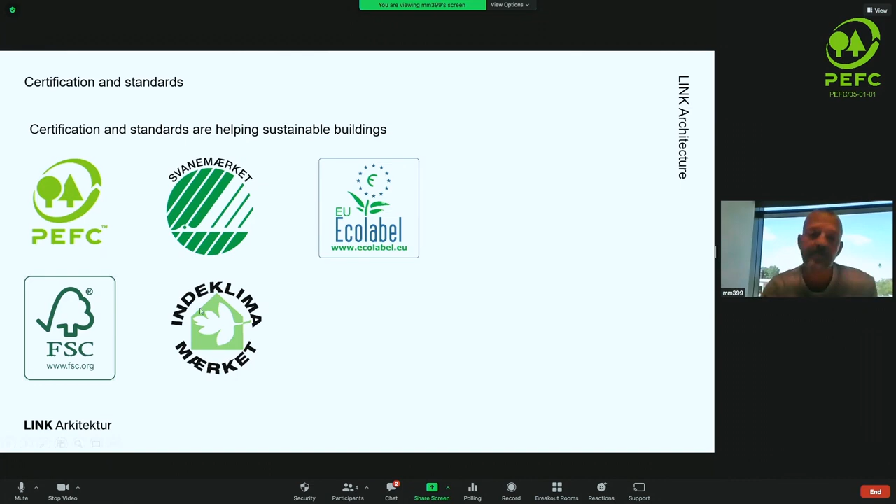Just want to show you a few examples of where we also use wood in construction in Link Architecture. The left here is a big hospital building in Hvidovre, near Copenhagen, where all the facades are actually wood. Cladding, the final cladding is not wood, but we have actually saved a lot of CO2 emission by substituting the traditional concrete sandwich construction with wooden elements.

We also have a building which is on the way near Oslo, Fyrstikbakken, which is a big apartment building where CLT construction is used, and where we also have a lot of experience with new layouts and new designs for different ways of combining modern family life in a housing estate.

And I've just got an example here also of a Swedish project, which is a little shop where, apart from being BREEAM certified, is also a NollCO2-byggnad. So it's like a concept shop also constructed in wood.

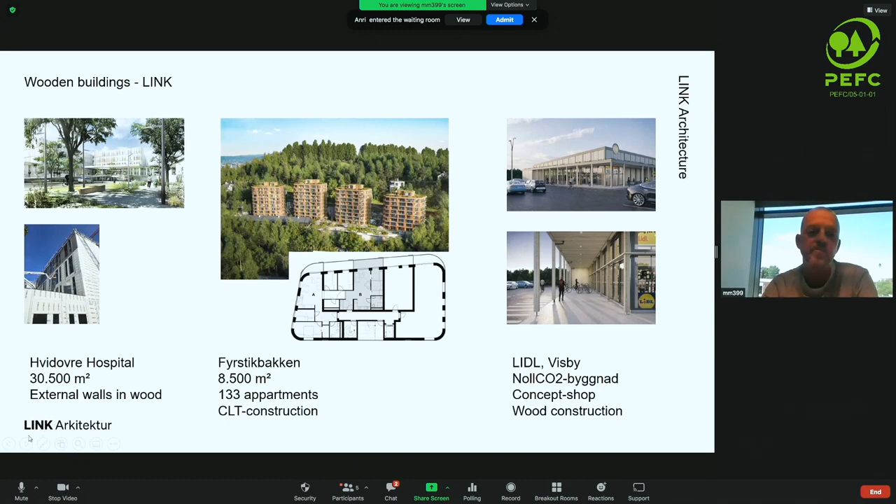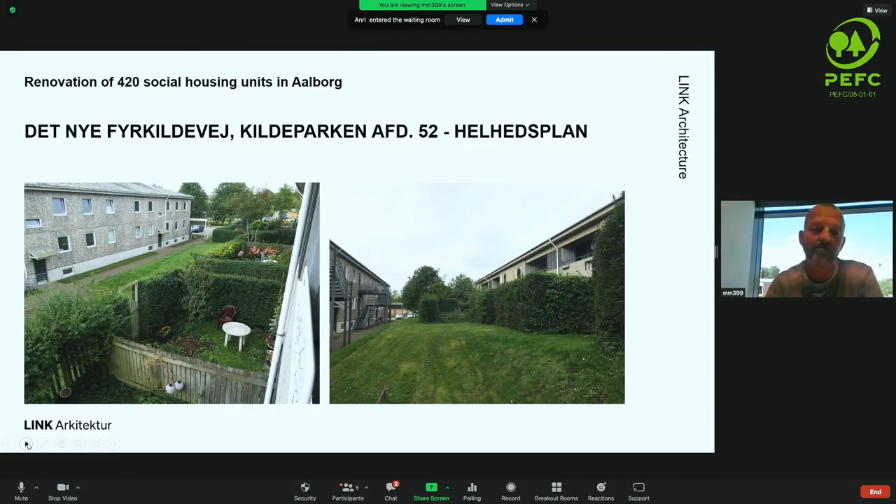The actual project I'd like to share with you is a housing project in Denmark, in the northern part of Jutland, where we renovated 420 housing units. As you can see from these pictures, it's not all that exciting, and it was pretty run down. This housing complex also had a problem of not being very popular or attractive, and not a lot of social interaction among the occupants was going on. Here you've got an aerial photo of the very uniform designed blocks in neatly positioned rows.

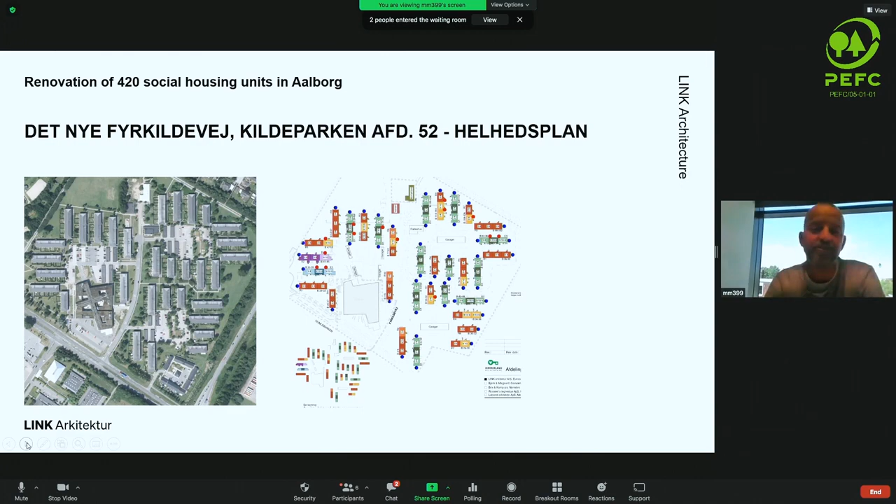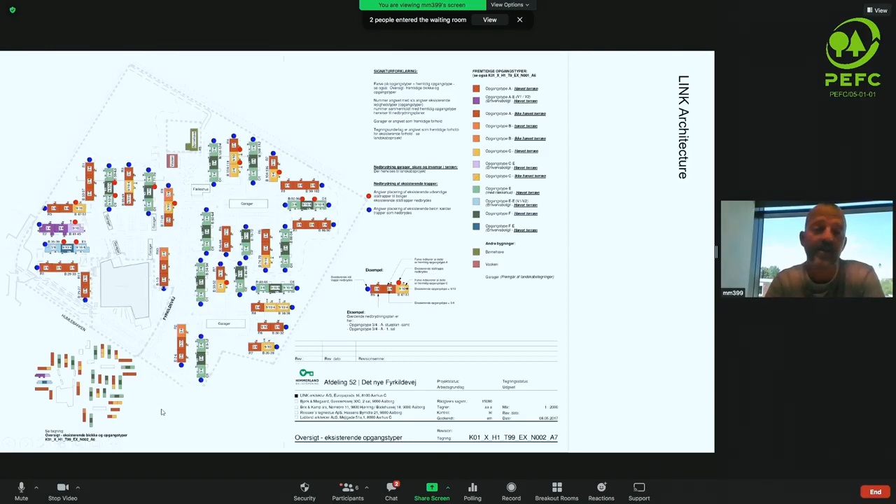We didn't want to demolish everything, because that's actually a big waste of resources and building materials. We wanted to see how we could improve these buildings and renovate them so they become attractive. The idea we came up with was to turn every second block around so that the blocks would start facing each other, in combination with a very big renovation of all the housing units. So here it's more clear that every second block is turned around to face each other, so that they invite some social activity in between the blocks.

And we were also able to create a social space where you'd actually meet your neighbor from the next door block.

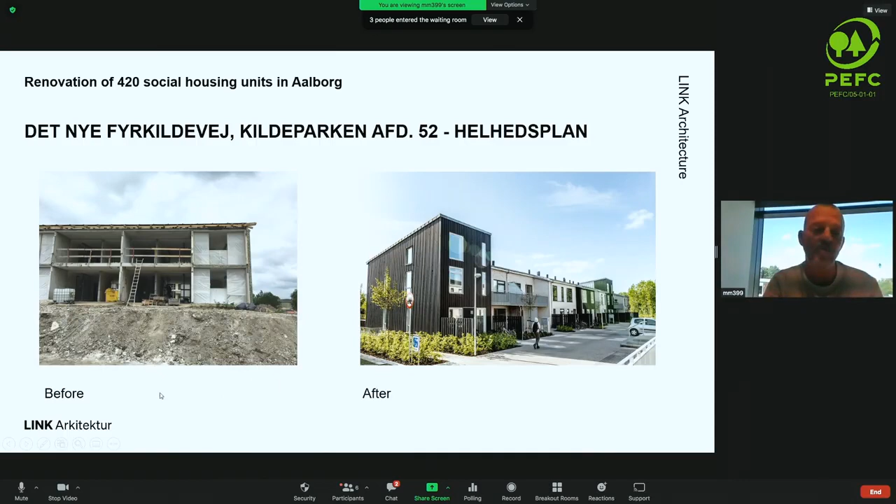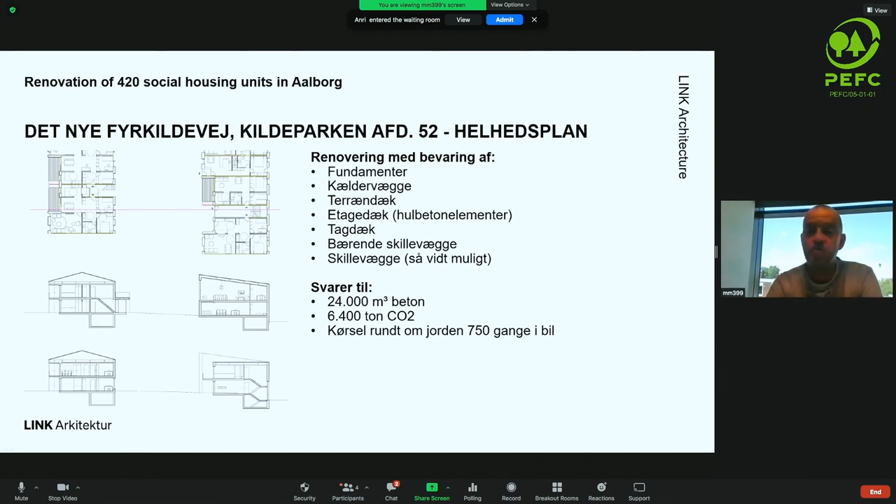So we preserved the foundation, basements, ground slab, slabs, and most roof constructions, and we also preserved all the load-bearing partition walls. All of these structures add up to 24,000 cubic meters of concrete, equivalent to 6,400 tons of CO2, which, if you calculate it, could make you drive around the Earth 750 times in a normal petrol car.

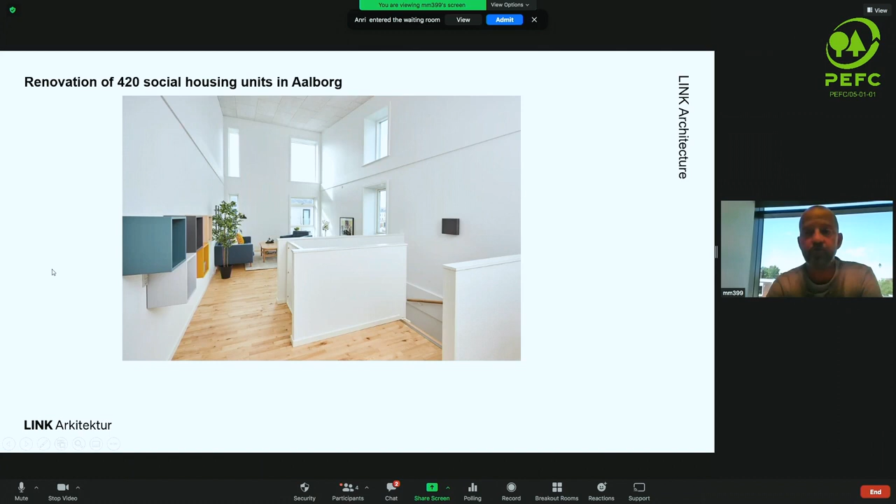And this is a picture of one of the finished apartments from these housing units.

And that was the end of my presentation. I hope it didn't take too long.

Thank you. Thank you. That was good.

So it was really great to get a picture of your work, and also some of the calculations you've gone through, and obviously some very interesting projects. I was wondering, you showed us a really good schedule on the reduction of carbon dioxide and the upcoming regulation. Has there been, within the construction industry in Denmark, a consensus when it comes to acceptance of this scheme?

Yeah, actually, when the climate law was adopted last year, they asked the different sectors of the industry to come up with their own plans and requirements to meet the target CO2 reductions set for the climate law. So initially the building industry came up with their own suggestions to the government, and then in April this year, adopted this new strategy. So most of the measures in the strategy are actually suggestions from the industry itself.